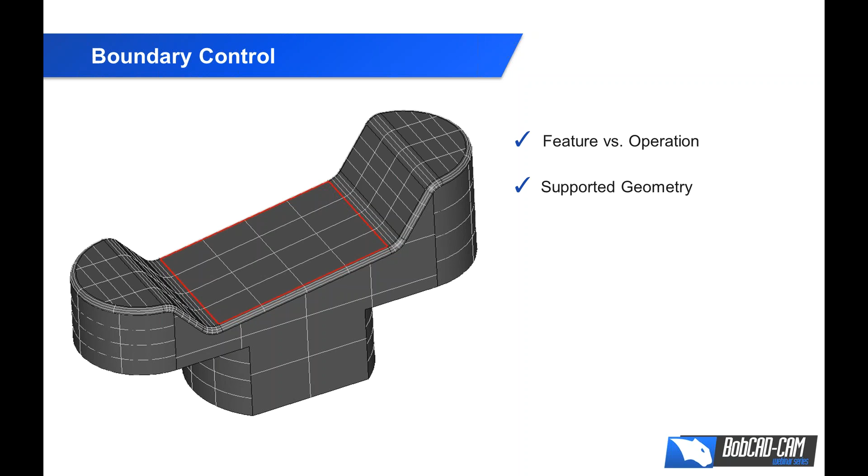We're going to talk about boundary control. When we're talking about boundary control, we're going to talk about feature versus operation boundaries. You have a feature boundary and an operation boundary. We're also going to talk about supported geometry, what you can use as a boundary, whether it's wireframe, surface edges, or loops. We're also going to talk about tool location, how the boundary affects where the tool is going to be.

Now, the big benefit of boundary control, or using a boundary for your 3D toolpath, is it limits where the toolpath is created by the selected boundary. So you select the geometry you want to work with, you select the boundary, and it gives you the ability to control where that toolpath is going to be generated.

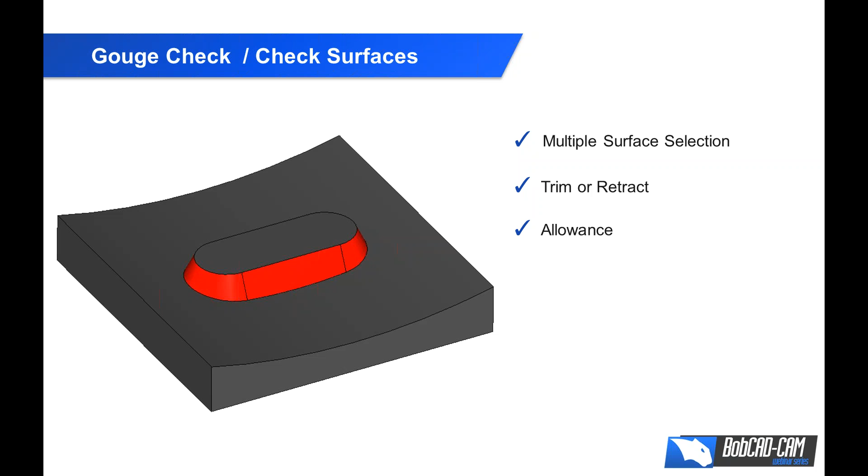All right, the other topic we're going to talk about today is gouge check with check surfaces. We're going to look at multiple surface selections, so you can select multiple surfaces to use in your gouge checking and check surfaces. We're also going to talk about trim and retract, the two different options that you have when you're using your check surfaces and different ways that you can use them. We're going to talk about allowance, how allowance plays a role in using check surfaces.

Now, the big benefit of gouge checking with check surfaces is it simplifies the user's control of where toolpath is created. And keep in mind, you can combine both boundaries and check surfaces for the ultimate control.

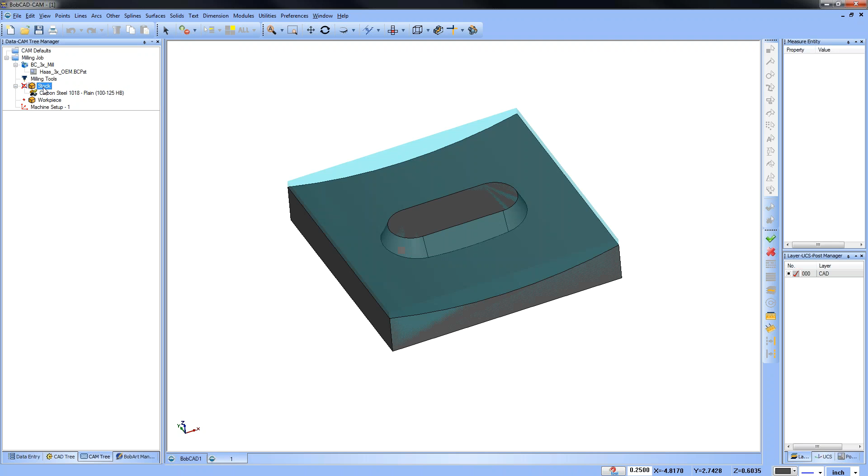So the first thing I want to address here is boundary control. I have my model, I have my job set up, I have my zero set up, okay? Everything's ready to go here. I'm going to load in my toolpath. So we're going to do a 3-axis. We're going to select our model here. Okay, we're going to go to our machining strategy, and I'm just going to use the advanced planar.

Okay, I'll set up a ball mill. The default is fine. The lace angle we're going to set to 0. Step over is fine. I'm just going to drop down the machining tolerance, and I'm just going to compute some toolpath. Now, if you haven't watched the 3D Bootcamp, I do recommend you watch that webinar.

It does cover a lot of topics about controlling your toolpath. But again, in today's webinar, we're talking about boundary control and check surfaces and the difference here. So we have our toolpath driving along this model. We can backplot this. You can see it moves back and forth over all the geometry that we've selected.

So the first thing that we want to talk about is the boundary control. Okay, so where do you select the boundary? If we wanted to limit where the toolpath was cutting on our model, one of the things that we would do is we would use a boundary. So when you look at the feature in the tree, you'll notice there's a feature boundary, and then we have an operation. You'll also notice that there's an operation boundary.

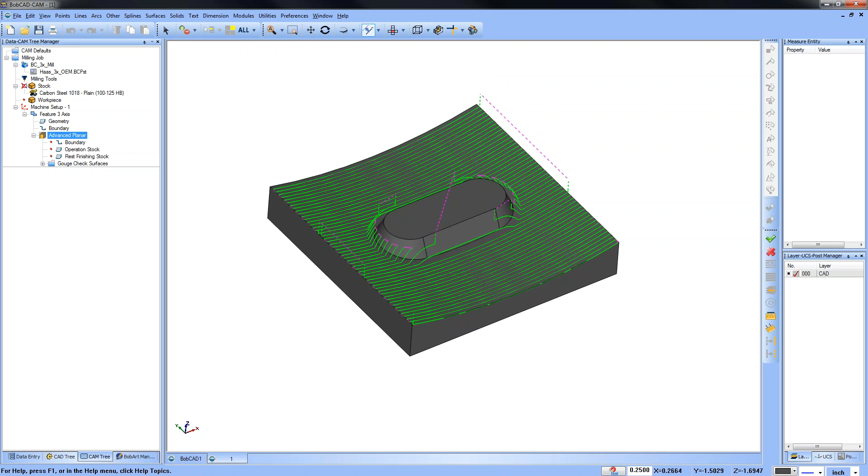Now, let's look at some of the geometry types that you can work with for a boundary. So if we come in here and we go to our boundary and we right-click and choose Reselect, right now the only thing that we have here is the solid model. So let's go ahead and just select this surface, hit our space bar, and recompute our toolpath. Now you will notice that it did trim the toolpath away from this model here, but that's typically not the methodology that I would use. I would generally not pick a surface to create a boundary, but you will find in some cases that you can get away with that.

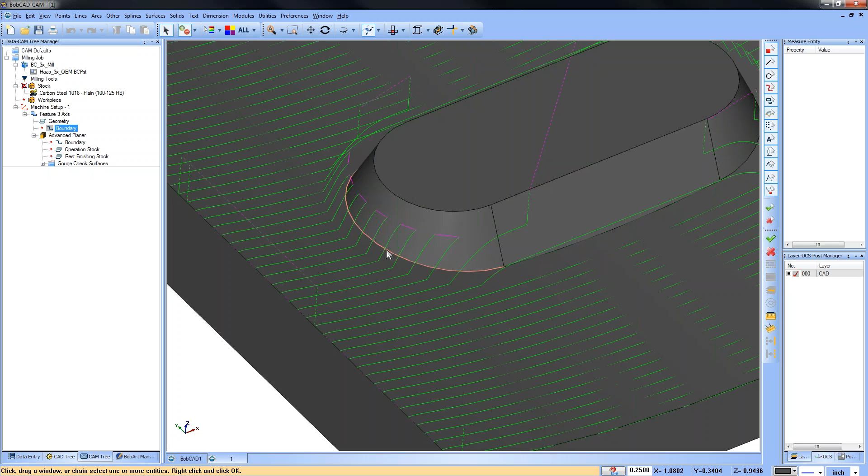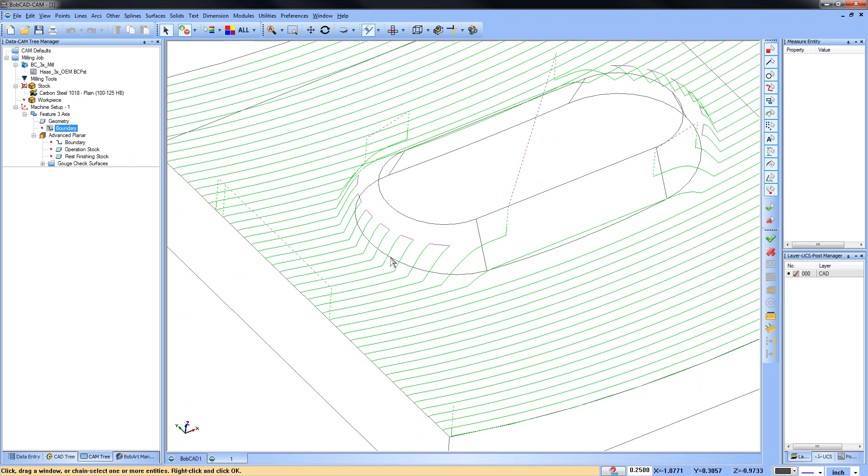More often, let's say I wanted to isolate this tapered boss here, I might come to the edge of that model. I'm going to turn my shading off by hitting S on my keyboard. I'm going to come over that edge and right click on it, and I'm going to get two different options: constant Z, or a loop selection. Now if I go to constant Z, what that's looking for is all the geometry that's at the same Z level. And as you can see in this example, it doesn't select all the way through because we're on a curved surface here.

The other option that we would have would be a loop selection. So if we right click on this edge and we go to loop, you're going to see there's two different options that are highlighted. There's this section in here, where it goes up and over this edge, and then there's also this outside selection here. Now the trick with the loops is not to pick the same edge that you started. You need to pick a different edge than you first started, either this edge to get this containment here, or this edge to get this containment here. So in this case I'm going to click on this edge and you'll see that it went all the way around, so it selected that loop there.

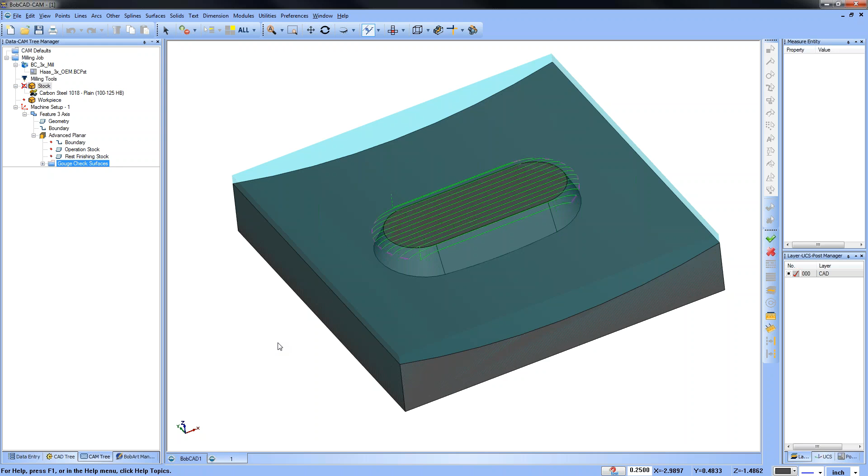So let's go ahead and hit our space bar to lock in our selection. We'll turn our shading back on. We'll recompute our toolpath. And what you're going to see is this toolpath is now limited to the boundary that we selected, which is right here. So instead of it cutting across the entire model, you can see that it's only cutting inside of that boundary. So where is your boundary located? It's either located at the feature level below geometry, or it's located below your operation. Hopefully that makes sense.

Now, when we're talking about supported geometry, we're talking about using surface edges. So I showed how to use a loop there. If we remove this, I picked the surface. That was one way that we did it. You could pick the surface, but generally that doesn't give you the control that you're really looking for. We're going to remove that. The next option you can do is to pick around the surface edges that you want to work with.

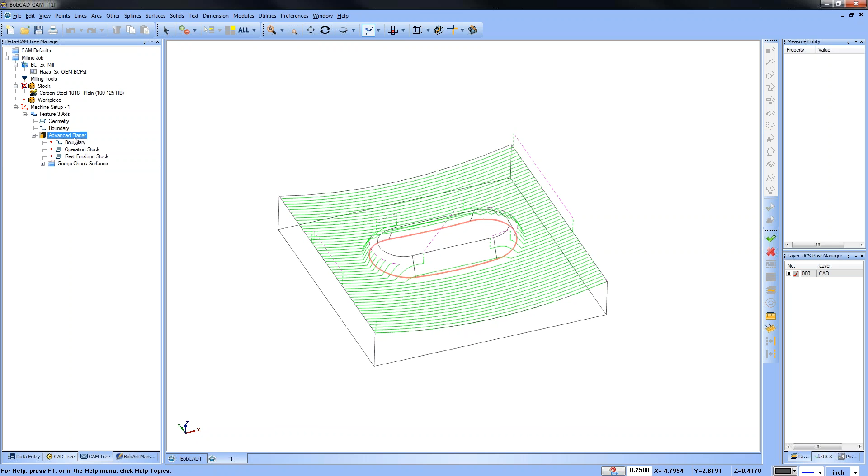So you can pick multiple surface edges, and you can recompute, and you can see that limits the toolpath then. Another option you can use when you reselect, you can right click on this edge and choose constant Z or a loop.

If you choose a loop selection, you just don't want to choose the same edge that you picked initially. You want to pick another edge that would represent the loop that you want to work with, okay? So all of those methods will work for boundary selection.

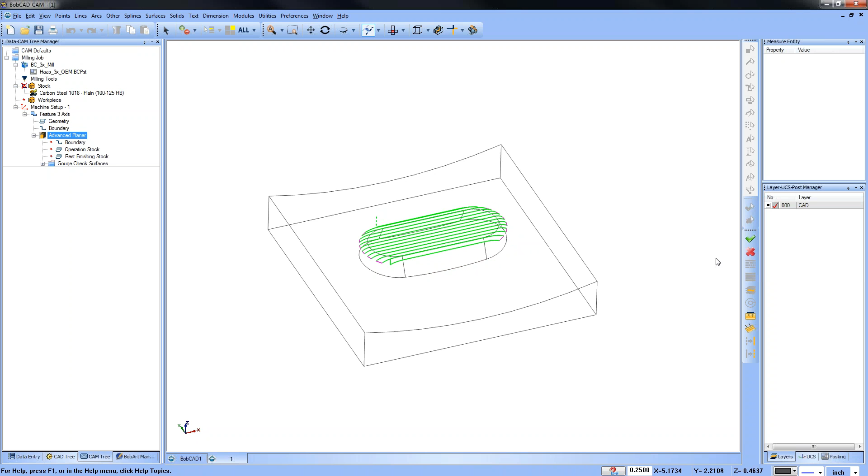Another option you could use as well if you want to go to wireframe is I would create a new layer. We could do extract edges, single, project to Z0. We can come in here and project a plane down, and then now we can use that wireframe as a boundary. Okay, so you can work with wireframe, you can work with surfaces, you can work with surface edges, you can work with constant Z, you can work with loops. So these are all the geometry inputs that you can use.

Now, it's also important to understand that even if the geometry isn't flat, so if I come in here, let me remove this boundary and reselect. If I pick some of these edges here, even though it's like a 3-axis curve, we can use those boundaries as well. Okay, so whether you're using the surface edge or the wireframe, it could be flat, it could be curved, it could be up and down in Z. So hopefully that makes sense for everybody. So that covers our supported geometry.

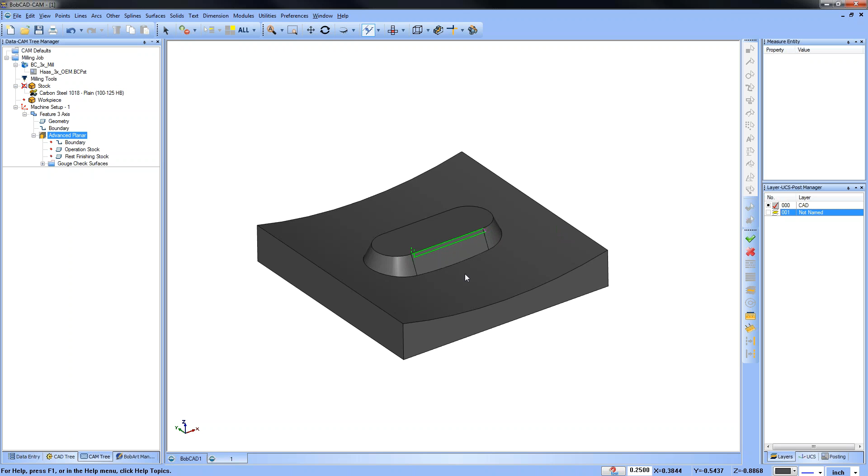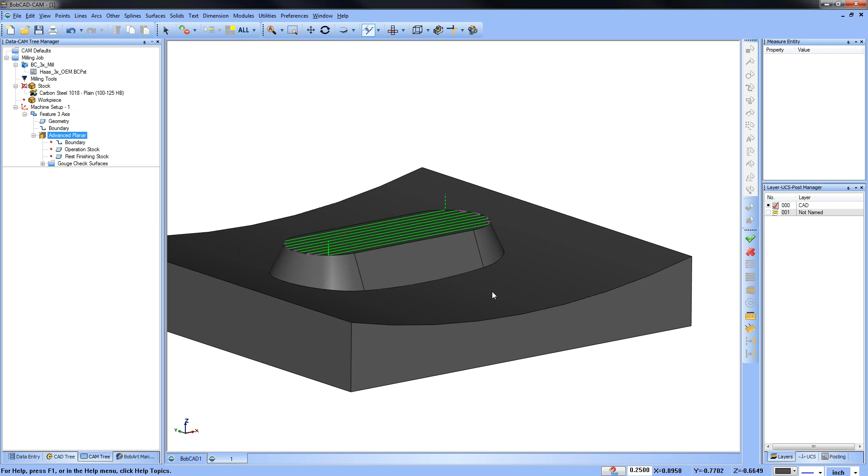Now the next thing that I want to talk about is the control of your boundary. So we selected a boundary, and as most of you know, the center of our tool is being driven to our boundary. Let's remove this. Let's come to this top edge here. We'll do constant Z, spacebar to lock it in, recompute. So we have this toolpath, and as you can see, the center of the tool is going to that boundary. So in some cases, that's going to work just fine.

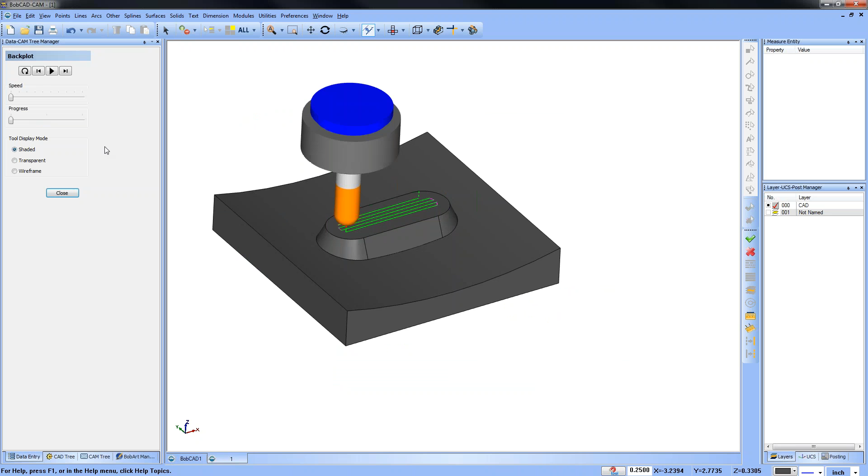In other cases, you may want it to extend outside of that boundary, or you may want it to come inside of that boundary. So if we edit our feature and we go to options, this is where you're going to see the limit control on the boundary. We can go to the center of the tool, which is the default. We can say tool inside with an offset. We can say tool outside with an offset. So if we say tool inside, it's going to adjust that boundary basically half the cutter, so the tool is staying inside of that boundary. So you have tool inside control.

If we come in here and we edit this, we go to options, we can say tool outside, we can recompute that, and then you can see there's tool outside control. So now we have the tool going outside of the boundary. So when you're using these boundaries, you have tool center by default, you have tool inside where it stays inside the boundary, and then you also have tool outside where the tool goes outside of the boundary.

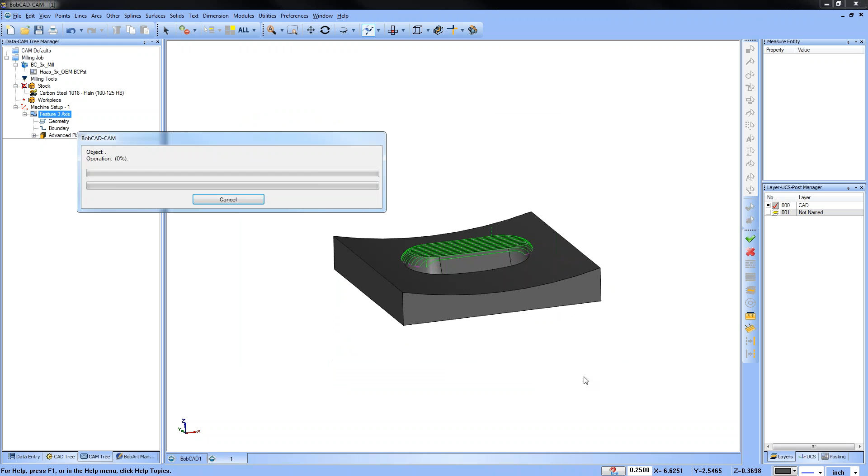Now you'll also notice that there was an offset option in there. So if we go to our options and we have an offset amount, we can tell it how much further we may want it to extend outside of that boundary. So here we selected the top edge. This is the boundary that we're working with. We said go outside, and then we gave it an additional offset amount to go even further outside of that boundary. All right, so hopefully that's clear.

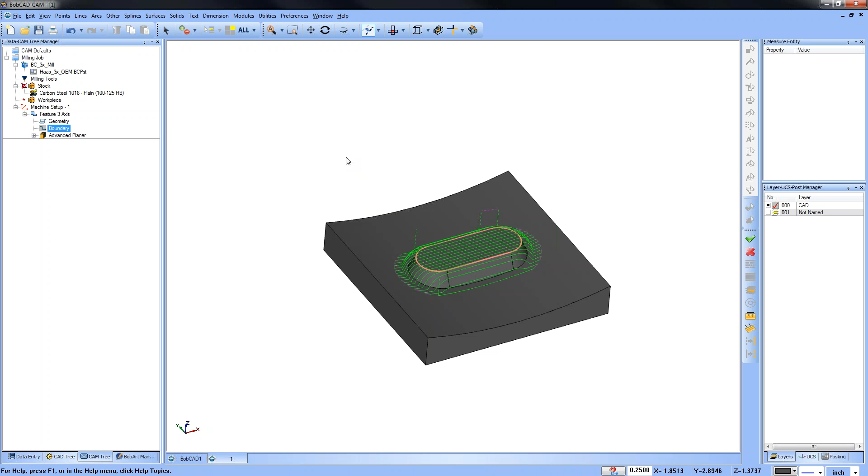You have your boundary control under the feature and under the operation. This allows you to use a different boundary for your feature or a different boundary for your operations. If you're using the same boundary for everything, you can select it once and then move forward.

Okay, we talked about the supported geometry. You can work with wireframe, you can work with surface edges, you can work with loops, you can even work with surfaces. All of those are available inputs for your boundary. The other thing we talked about is the control for center, inside, and outside. You can have the tool go to the inside of the boundary or the outside of the boundary, and you can offset.

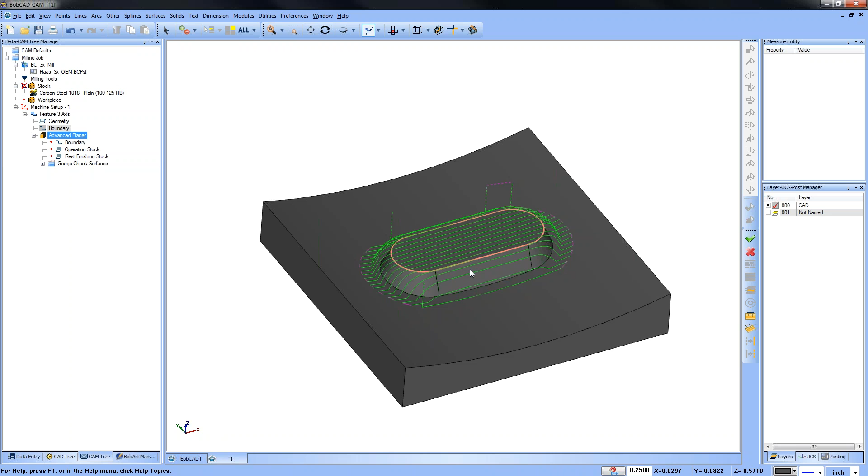Now, we did get a question that came in here. What if you want to cut the curved surface? So let's go ahead and take a look at that. Let's remove our boundary here and recompute our toolpath, and you can see the toolpath is cutting across the model. Now, if we want to limit the toolpath so that it doesn't cut this area here, we come in and select our boundary, let's go to our wireframe, for instance. We can select this shape and this shape, and we can compute that toolpath.

Let me turn my options off. Let's go back to Tool Center and recompute. What you're going to see now is the tool is going to the center of the boundary. So it's cutting the curved surface, and then it's cutting to the center of the boundary. So it's going from the outside to the inside of the boundary.

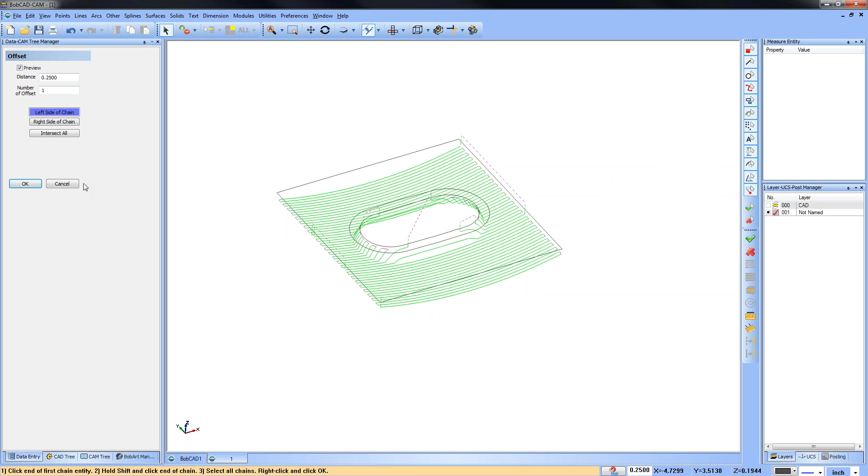Now the thing is, we may want it to stay further away from this wall and not right up this surface here, okay? So what you might do is offset some of this information. You might offset that boundary a little bit further. You might offset this boundary a little bit further. So that gives you a little more reach as far as what the containment is. You can change it by using the wireframe boundary. So now I can keep it away from that wall, and I can have it drive up to the edge of the surface. So hopefully that makes sense.

Now, keep in mind, today's webinar is about boundaries versus check surfaces, okay? So I want to cover some of the basics of the boundary control and how that works. So we talked about where it's located, feature boundaries versus operation boundaries, the supported geometry, and then controlling center, inside, and outside.

So does anybody have a question about that? If that's not clear to you at this point, go ahead and raise your hand. Ron says it's not clear. Terry says it's not clear. Terry Rinker says it's not clear. Okay, what if there is something that is unclear about using boundaries to limit your toolpath? Go ahead and type that question into the question box right now.

Okay. Let me see here. Let's see if Terry Brooks has a microphone. Terry, can you hear me? Do you have a speaker or a microphone over there? No? Okay. Thomas, do you have a microphone over there? Nope. All right, no mics. Let me clear everybody's hand. If you still have a question about this and you have a microphone, go ahead and raise your hand. Oh, let's see. Somebody here. Hold on. Who do we have?

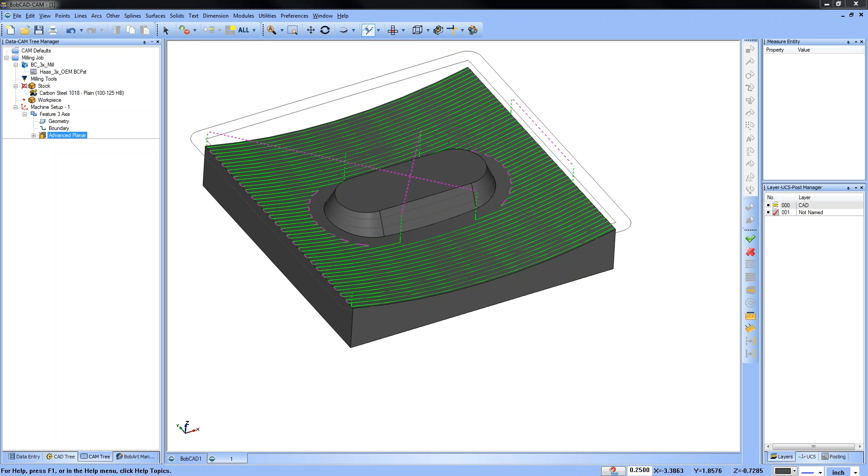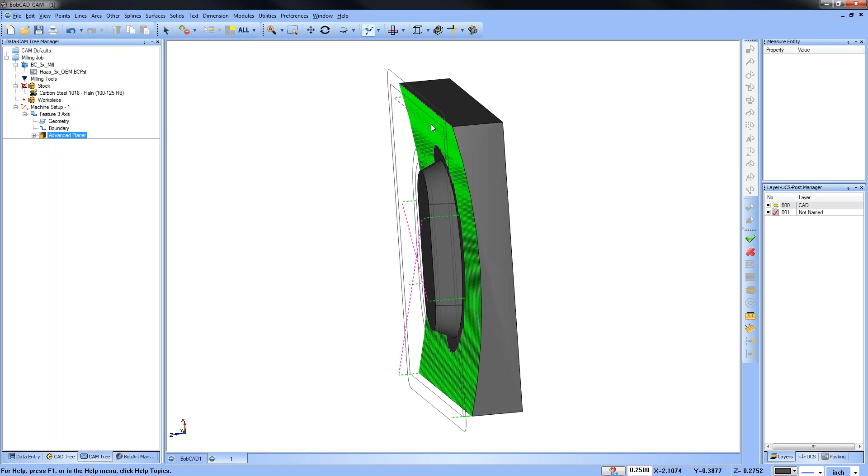And a question that I mentioned to you probably a couple of weeks ago during one of the seminars is when there's a 90-degree angle, for an example, what you have up here on the screen, if we were to turn this on its side and you were coming down, in fact, go to your X, make your X to where it's upright, because what I'm getting at is if you're cutting straight down on this, you know, even though this has a curve, and I was coming straight down on that, like right now, say we're looking at it from a Z perspective,

coming down on that to cut this right where the tangent curve is on your center portion, that example I gave you of that elephant seal, I was struggling to find the trade-off between not touching that edge that your cursor is on currently and that inner edge using, say, I was attempting to use a 1/8 inch end mill. Right. Okay. Now, does that make sense?

I believe we're cutting along this surface here. Is that correct? And yes. You want to stay away from this edge? Yes. And you want to stay away from this edge here, or no? No. Okay. Actually, I want to. Is this a tapered or a straight walled? So you're doing like a Z-level finish?

Did I lose you? No, I'm still here. This damn mic cuts in and out, and that's why I don't use it that often.

Okay. So you're doing like a Z-level finish on this? Actually, that wasn't the part I was trying to cut. The center part is actually what I was trying to cut. That was kind of representing, say, that elephant seal that I was doing. Right. So I would be coming down, and the part that you have the boundary on would be like the base that I don't want to cut.

But I want to be able to define like a front flipper or just some detail on this object. But trying to find that balance and that trade-off between touching the part and not touching what I would say is the foundation, so to speak. Man, I struggled with that for hours. Well, and did you utilize the check surfaces?

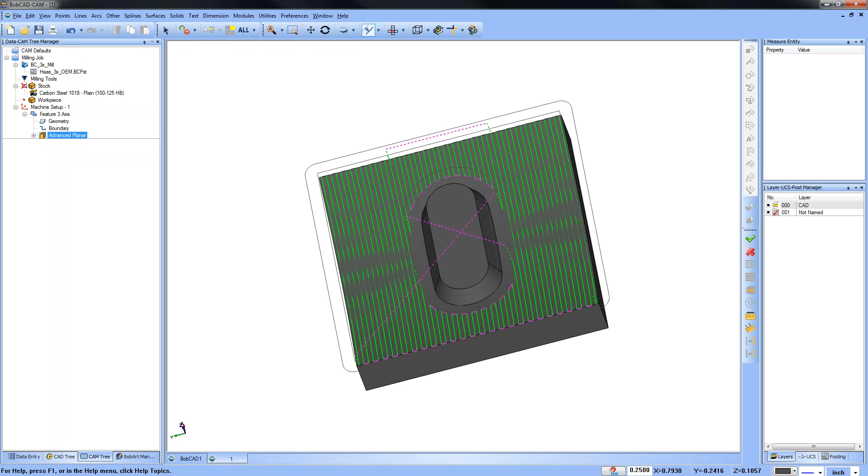It was just challenging, to say the least, because trying to find that trade-off between, and you've mentioned this before, Al, is, you have to do one thing, compute it, see how it reacts, do one thing. Again, I spent hours trying to find the balance between not touching the base of the part and still getting the detail I wanted on the 3D object I was trying to cut.

Yeah, no, there definitely is a balance, and that's really the main point of today's webinar, is really showing you how the boundaries work so you understand those, but then also how the check surfaces work as well. And sometimes it's a combination of both, but it does take a good understanding of the check surfaces and the way that they work. So hopefully as we continue on here, it will bring some insight to that. And again, we can always work together after the webinar to go into more detail.

Okay, Brian? Yeah, I appreciate it, Al. Thank you much. Thank you, bud.

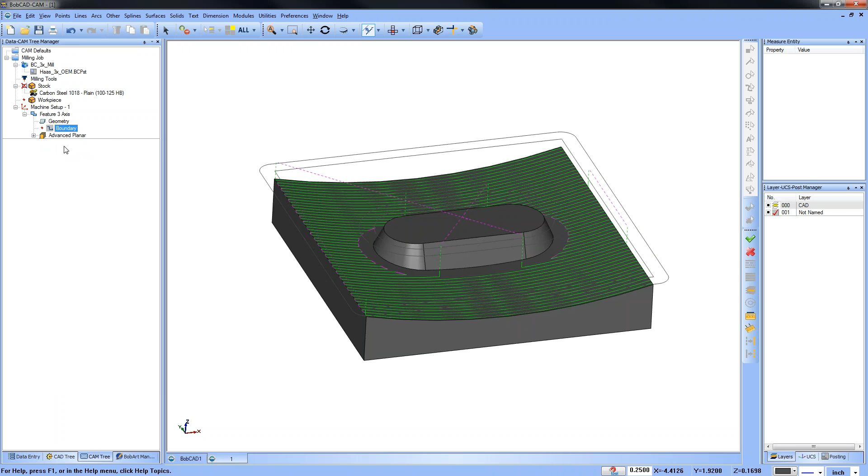Thank you. Okay, so it looks like we're pretty clear with our boundary control at this time, and let's move forward to the next topic. Okay, so the next thing we're talking about here are the check surfaces. So what I'm going to do is I'm going to remove this boundary control here, and I'm going to recompute my toolpath.

Okay, so the difference really between the boundary control and the check surfaces has to do with what your input geometry is. So again, instead of limiting where the toolpath is being generated, we're going to use our check surfaces to say we're making contact or we're getting close to this surface, and then what do we want to have happen. So the first thing we want to talk about is where are the check surfaces located.

So if we edit our feature and we go to where it says gouge check, this is where you're going to find the check surfaces. Now, in order to turn it on, you go to where it says check one and you turn it on. From here, you can select the surfaces that you want to check against. You have your allowance value.

You have whether you're checking against the tool or the tool and the holder, and then you have the strategy that you're going to use, whether you're going to do a retract or bump the tool up, or whether you're going to do a trim and a relink, okay? So this is where your check surfaces are located.

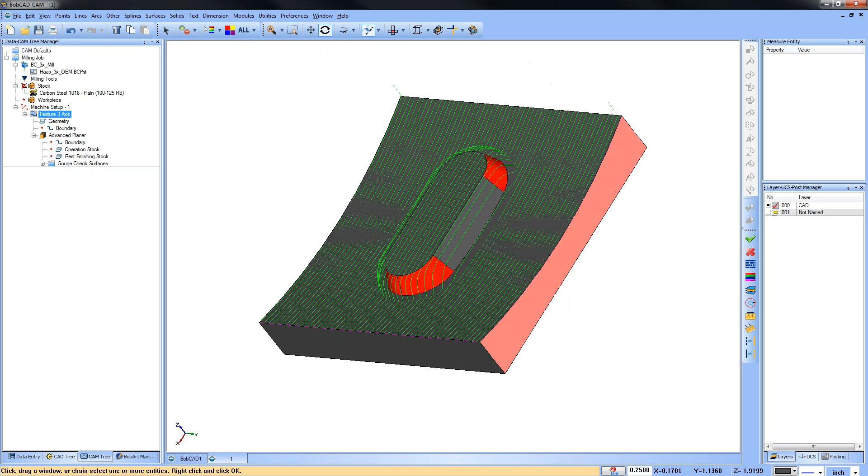The type of geometry you can work with check surfaces are, you guessed it, surfaces. Okay, so we're going to want to go ahead and click check surface, and then we're going to select the surfaces that we want to pay attention to. So in this case, I'm going to select just the walls of this tapered boss here. We'll hit our space bar.

What we want to do is trim and relink our tool path, and I'm going to leave my allowance at 0 to begin with, and then I'm going to compute. And what you're going to see is really nothing changed, right? Hopefully that's not surprising to you. The allowance is saying how close the tool can get to that surface, and if I didn't leave an allowance, then the tool is going to drive right to that surface.

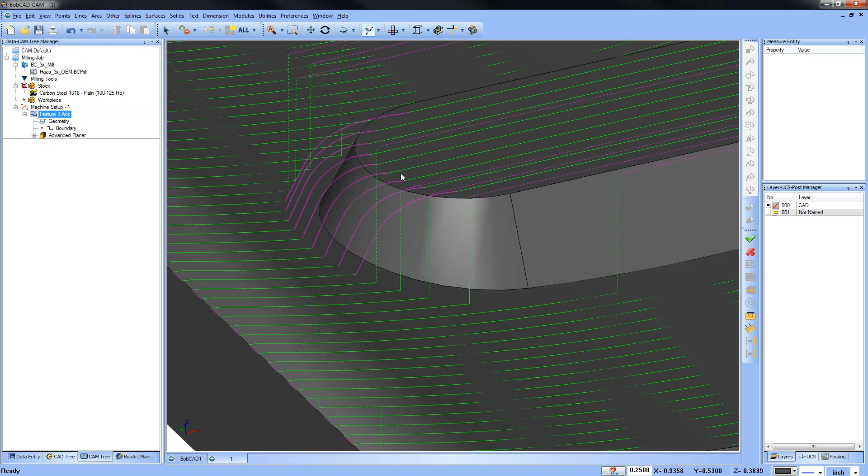If we come in here and we edit this again, and now we add an allowance amount and we recompute that tool path, now you're going to see areas where it's starting to push back or trim away the tool path. These are linking moves you're seeing here. These moves here are rapiding and then moving over, okay?

So as we increase our allowance, bump this number up further and further, the tool's going to stay further and further away from these walls here, and these are the walls that we had selected. So we're having them go up, go over, and it's also staying away from this edge. Now if we add to our check surface this top one as well,

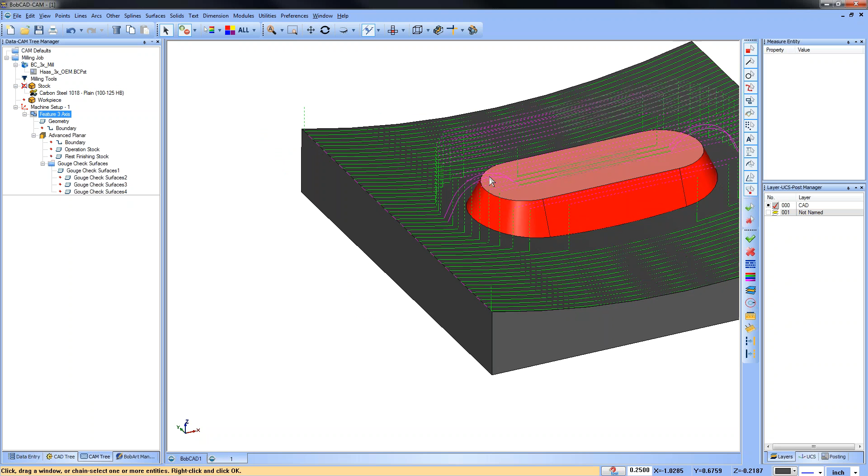okay, if we add that top one as well and then we recompute, you're going to see it's just going to check out that area altogether. And as we increase our allowance, it's going to move further and further away from that surface. So the check surfaces and gouge checking is located within the feature, down here where it says gouge check. The type of geometry that is supported is the surface geometry.

The control that you have is you can either trim and relink, or you can bump the tool up where it will get away from that area. And Brian, that may be the solution you were looking for: not trimming the tool path away, but instead using the retract method to bump it up so that you're getting as close to that surface as you possibly can.

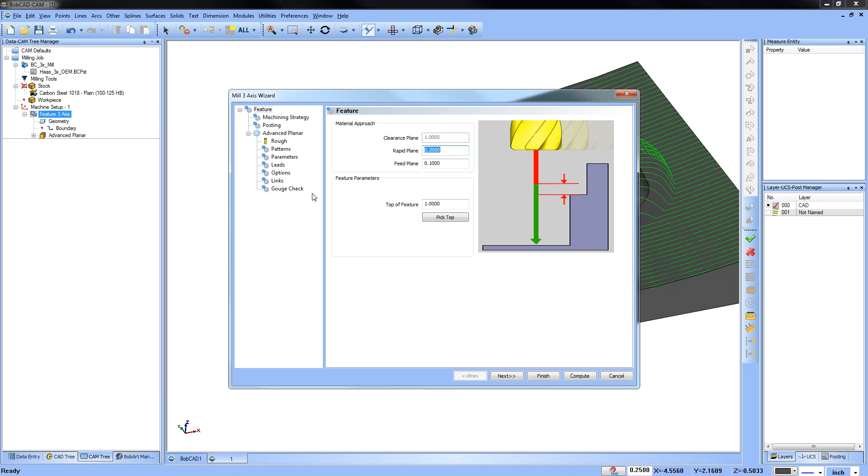So let's go ahead and edit this. We're going to make this number bigger just so we can exaggerate it. Using the retract, you can bump it up. This is saying the clearance plane is too low. If you make it too large and it runs into the clearance plane, then it will error out, and you'd need to change your clearance plane so that you have room for the tool path to be calculated. We'll drop it down again.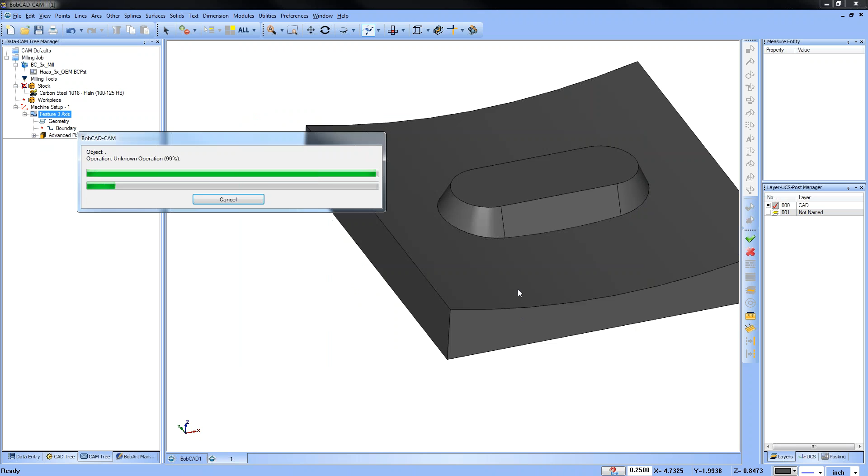The idea here is to show you that the tool path is being bumped up, staying away from that surface, or retracting away from that surface. These are great features to have, because unlike boundaries where you're limiting where the tool path is generated, you can select surfaces and say, trim away from there, or stay away from there. That's what I really like about the combination of boundaries and check surfaces.

The next thing we want to look at is what toolpaths offer these check surfaces. If we edit this feature, all of your Mill Professional toolpaths offer check surfaces: advanced rough, flatlands, equidistant, pencil, advanced planar, project curves, and advanced Z-level finish. All of these utilize the check surfaces to trim away or to bump up your toolpath.

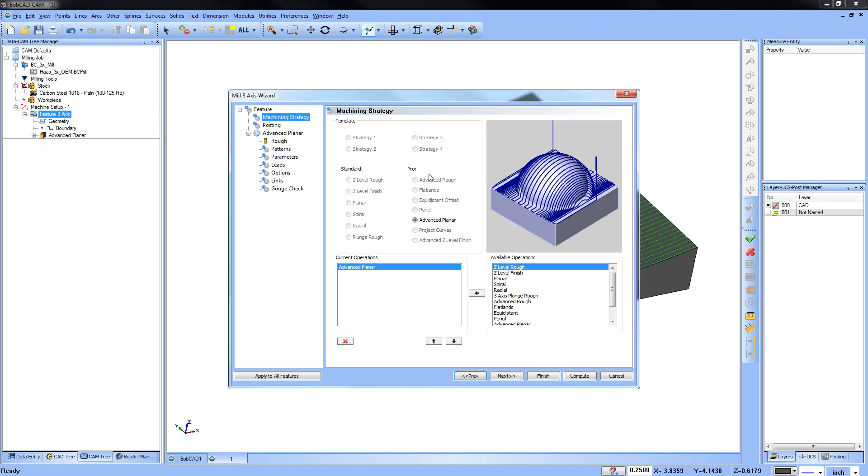So we talked about boundary control, what's supported, the way that it works, where it's located. We talked about our check surfaces, where it's located, what type of geometry is supported, and then the control that you have on it. And then we talked about which toolpath features have it available, and it's all of your mill professional toolpath features have those options for you.

All right, so if we're looking at this here, let's play around with this file for just a second. At one point we had selected these surfaces here. Let's go ahead and clear that selection. This time we're going to select this surface here, and we're going to recompute. And what you're going to see now, this is where we're bumping it up. So it's bumping up the toolpath away from this surface here and generating our same toolpath. So we're adding more stock to finish on the bottom there, okay?

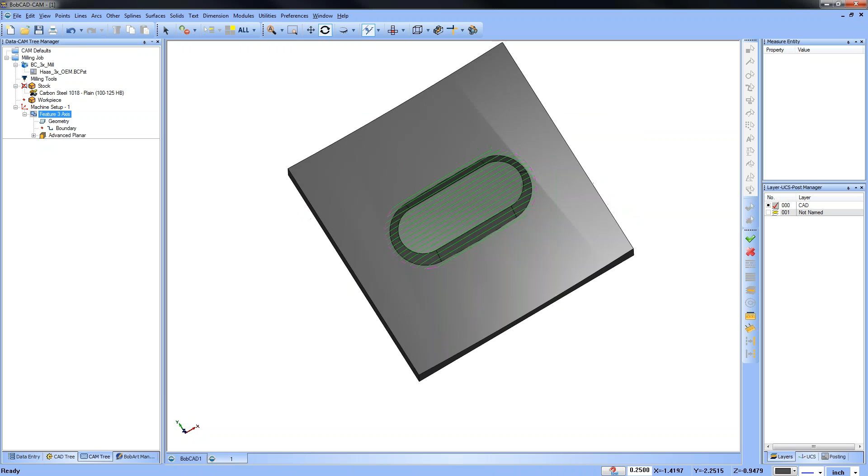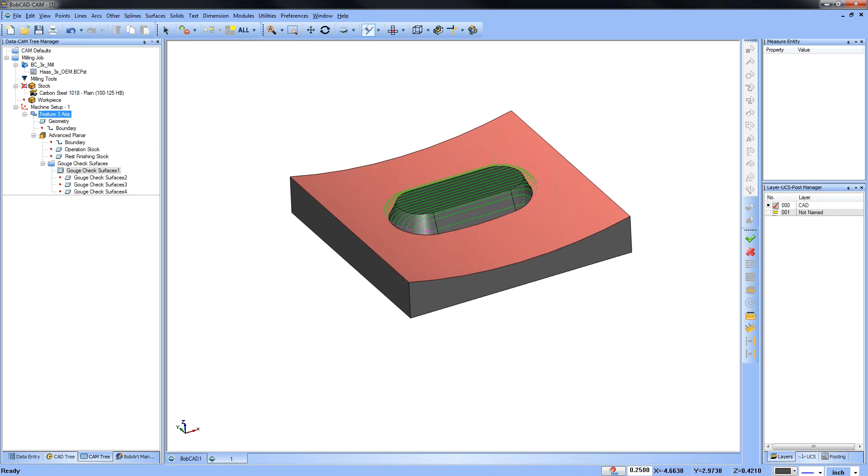If we come in here and, instead of doing a retract tool, we do a trim and relink and we recompute that, what you're going to see is it's going to trim away the toolpath that makes contact with the check surface that is selected. Okay, so hopefully that makes sense for everybody. All right, so now let's take a look at some more sample files, because I really want to make sure everybody has a good understanding of the way that these check surfaces work.

Okay, so here we have another file. We have our toolpath selected. Again, just a planar toolpath. The check surfaces that we've selected were these top surfaces here. We have it set to trim and relink, and what that's doing is we're saying, hey, we need to avoid toolpath making contact with these surfaces here, and you can see that it's trimming and relinking that toolpath.

All right, now another thing that I think is pretty important has to do with the fact that you can have multiple check surface groups. If we get into this feature and we look at our gouge check, you have check 1, 2, 3, 4. When you first start using gouge checking, I definitely recommend that you start with just one check surface at a time.

Now, Ernesto had a question about, are the rapid lines bumped up too? The rapid lines are going to follow your clearance settings that you have set in your feature. So if you go to the feature, clearance plane, rapid plane, feed plane, these are going to be the options as far as where the tool is driven to. Marja said, what about the options to trim and relink? Can you explain which ones to use? So we're going to look at that in this particular example here.

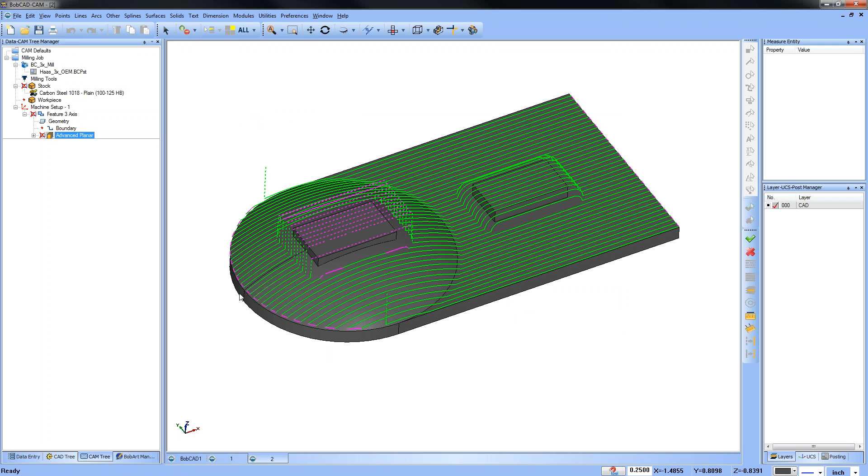Okay, so we have our check surfaces. What I'm talking about is you can use different check surfaces. So we're going to click check surface here, and we're going to remove this one, spacebar. We're going to recompute. And what we're going to see is the toolpath is now driving along the top of that surface here, with a certain clearance amount that we have set. Now we're going to use a second check surface. We're going to select this surface here. We'll use our trim and relink, and then we're going to add a different allowance here.

So this is one of the features of using check surfaces that you don't really have for the boundary control. With a boundary control, you can set an XY boundary. So we could go to wireframe and set an XY boundary, so you could have it closer to one boss than the other boss. But with the check surfaces, you can select different groups of surfaces and apply different allowances, which I think is a really great feature and gives you a lot of control and flexibility. So we can use different allowances for the different surfaces that we've selected.

Let's go ahead and turn that one off and recompute. All right, we're going to add this surface here. Okay, and recompute, and you can see that our toolpath is generated there. Now, when you start using the gouge checking and check surfaces, when you go to trim and relink, you do have a bunch of different options in here.

If we scroll down, you can see after first collision, before last collision, between first and last collision, trim before first collision, trim after last collision. And what this does, if you use trim collision only, a lot of times that's going to give you a result that is beneficial, but one of the things that you're going to notice here is that we have a lot of up and down tool motion. So we're making contact and we're going up and down, and that may not be the ideal scenario.

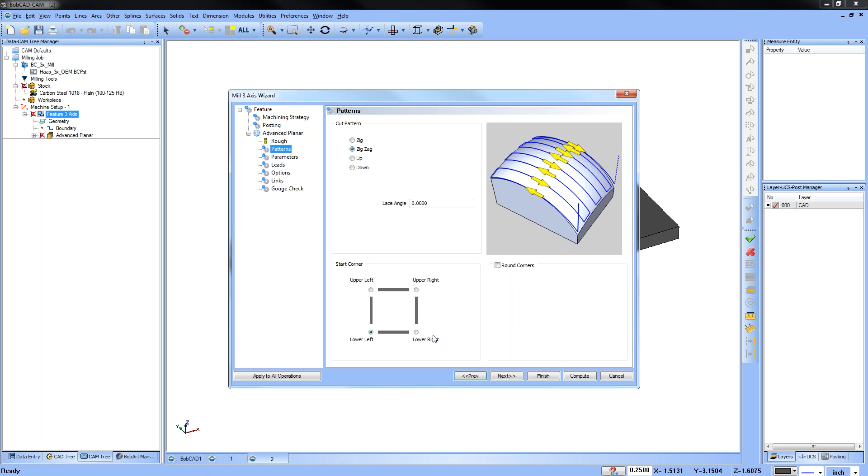Now, another question that came up that I didn't address here, someone asked earlier where the tool starts from. If we go in our pattern page, if you want to change which corner it starts in, you can just click on which corner it starts in, and that's the control that you're going to have for like planar, where the tool starts. In some of the other strategies, it's going to depend on what options are available in that strategy. But in this particular strategy, we can choose which side we want it to start on just by clicking our start corner, and that's the control that you have there.

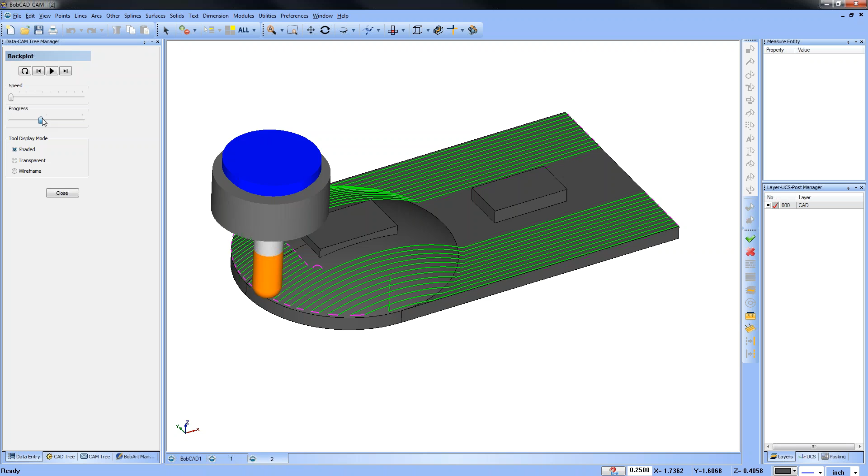Okay, so we have our tool path. It's moving back and forth. It's starting in this front corner here, and as soon as it makes a contact to trim out, it trims away all the tool path that's in that area.

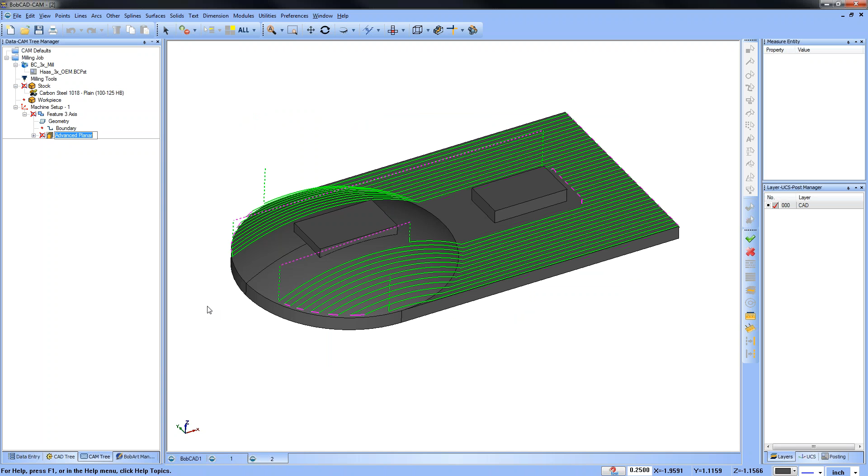Again, when we had that turned off, if we go to trim collision only, that just removes the tool path, and it generates tool path in between here, but we get a bunch of up and down motion, and the control that you have to lead the tool in, that is where it may be lacking some of the control that you want. So using some of these different trim options will allow you to address different areas. If we go trim after last and we recompute, we're going to see a different set. So now it's switched which side it was working on.

So my best recommendation for you is to go through these and get familiar with them, and the more you use it, you're going to find scenarios where you want to use one over the other. So when you first start, just trim at collision, and then from there you can work through some of the different options and see the effects that it's going to have on your tool path. Again, giving you the control to come in and work through some of this stuff here.

Let's see, there's another question. How can I let the tool travel outside the boundary if I need it to? Say I'm cutting a channel on a flat part and I selected my geometry. It won't let me escape that boundary. How do I change this so the tool will be able to go outside of that area? Thank you, Jeremy. That's a great question. I'm sure everybody has run into this. I know I've run into it myself quite a bit when trying to use a boundary.

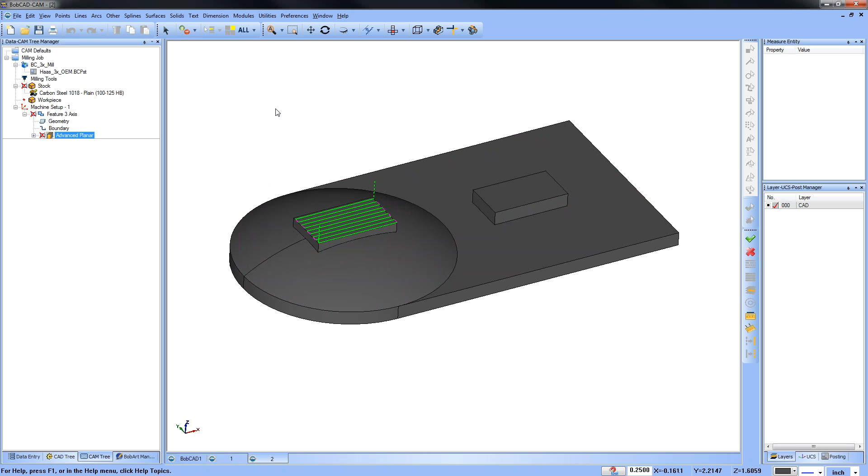So let's turn our gouge checking off, and we're going to recompute here, and you see that we have our tool path. Let me grab one of these loops, this constant Z here. The way this works, Jeremy, in short, is there has to be geometry there, like surfaces. 3D tool paths are based off of surfaces and solids, and if you want the tool to go outside of that boundary, go to options, set tool outside to 1 inch and recompute, and you're going to see that the tool path goes outside of that boundary. Here you can clearly see it's going outside of that boundary.

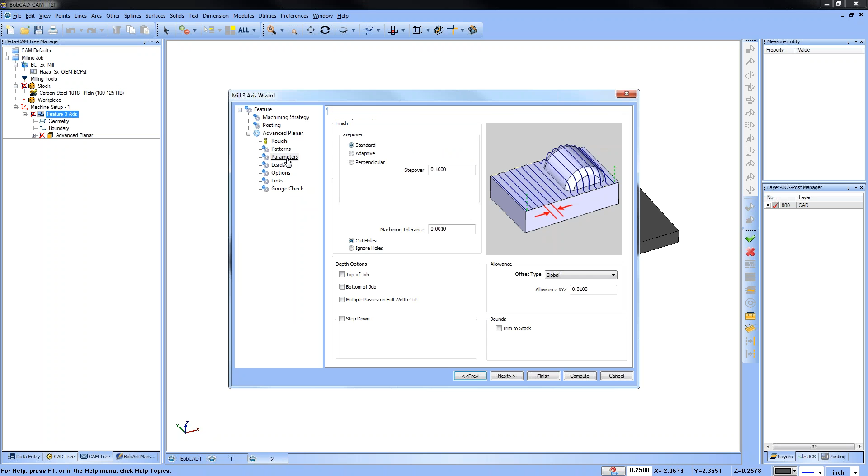Now, if we want it to go further outside of that boundary, let's make it 1.5 and recompute, and you're going to see that it's going further on this side, but it's not going further on the left side.

Okay, and that's because there's no surface. Well, there's a couple of reasons, but there's no surfaces to be driven along there. If you look under some of your other options, your cutting extents, we have set to extents. So that is another limit that's happening on the tool path.

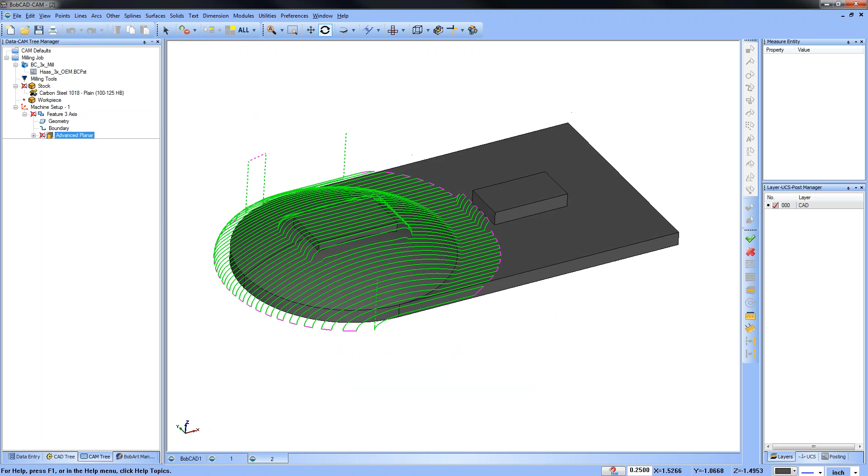If we go to part bottom and we recompute, what we're going to see now is that it extends past that edge, and then it's also going to start going down to the bottom of the part. Okay. The other thing that you would look at here is if you say 3D extents, that's kind of like a rollover amount, and that's going to roll over past the edge of the part as well.

Okay, so these are some of the options that you're looking for, but I think the scenario you're talking about is where you don't really have tool path to drive that tool along. And keep in mind, the boundary that we selected was this boundary here. So you can see that I was able to get it to go outside of that by using the tool outside, but in order to get it to trim past the edge of this surface, I had to adjust some of my other limits. So hopefully that makes sense for you there, Jeremy.

I think that is a great question. So thank you for sharing that.

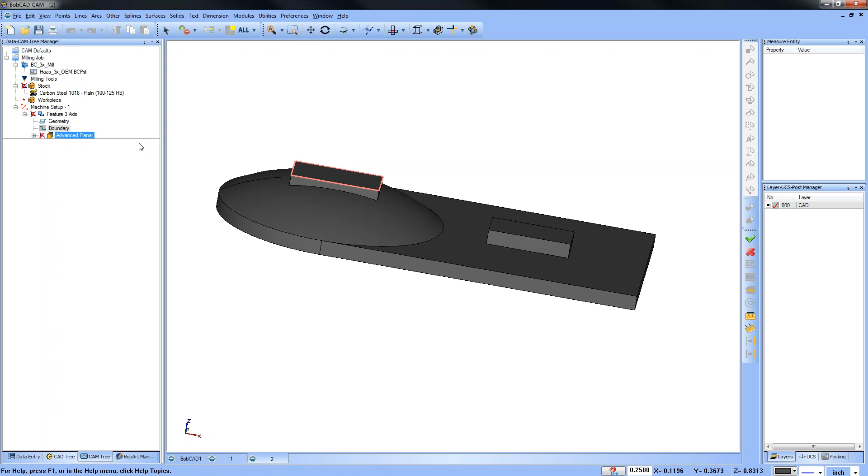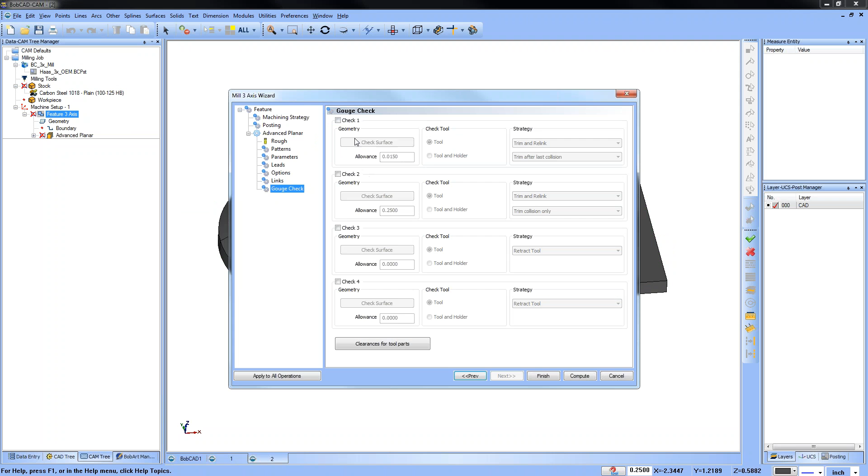Okay, so what do we got? So we got our surfaces. Let's look at some other ways that we can do this. Let's remove our boundary here, and we'll recompute our toolpath. So we have our toolpath going over the whole model. If we wanted to eliminate the toolpath from running along these surfaces, we can go to a gouge check, let's remove this one and this one, and we'll select this one here as well.

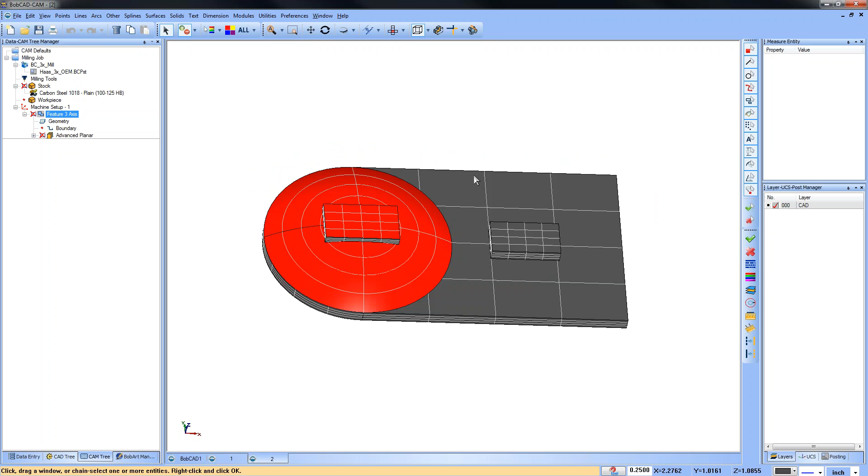If you guys ever are having problems selecting surfaces, kind of like what I was showing there, sometimes it makes sense just to go to a wireframe view. This is S and W on your keyboard. It will help so that you're seeing the same things that the software is seeing when we're doing a selection.

Okay, so we're going to hit our space bar. We're going to trim and relink. We'll go ahead and recompute. And you can see this is a way to limit the toolpath to run along these edges here and to stay away from this surface, okay?

So again, when we're looking at using boundaries versus using check surfaces, there's pros and cons to each. When it comes to check surfaces, I think you'll find it a lot easier to say, hey, if you make contact with the surface, bump up or trim away, okay? So I'm glad that helped you out there, Jeremy.

All right, let's look at another file here. Let me close this guy down, and I'm going to load up this file here. All right, so the other day I was working with a client, and he had this part he was trying to cut, and we were trying to use flatlands, and no matter what we did, it just would not let us use flatlands, okay? And I was stumped, and I didn't know what it was.

And actually what had happened is the surface had a slight taper to it, but it was very difficult to see it. And that was kind of the mindset that I had when creating this sample file here, showing how you can drive toolpath along surfaces that are in a little different areas that could be a little more difficult to create a boundary for, to keep the tool away from.

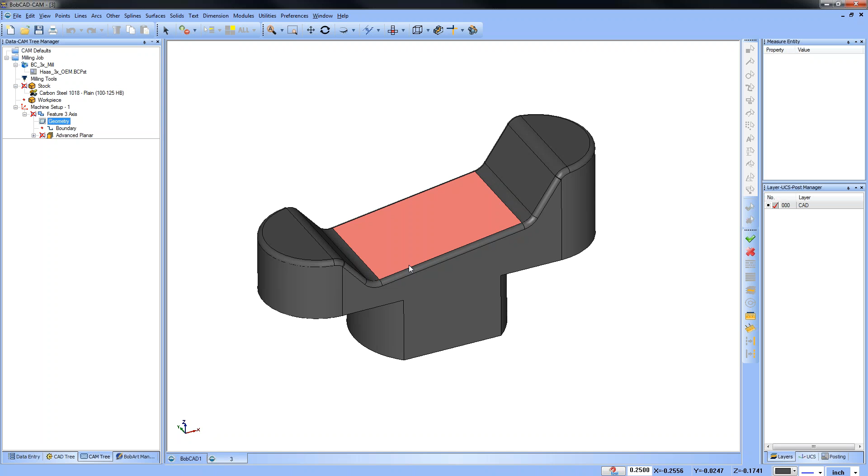Okay, so if we look at this model here, I do have this check surface set up. Let's go ahead and turn that off and recompute our toolpath. And you're going to see that this is the surface that I want to cut, and this is the toolpath that's being generated on that surface. Now, when you're doing 3D machining with BobCAD, the surface that you select determines where the toolpath is driven to.

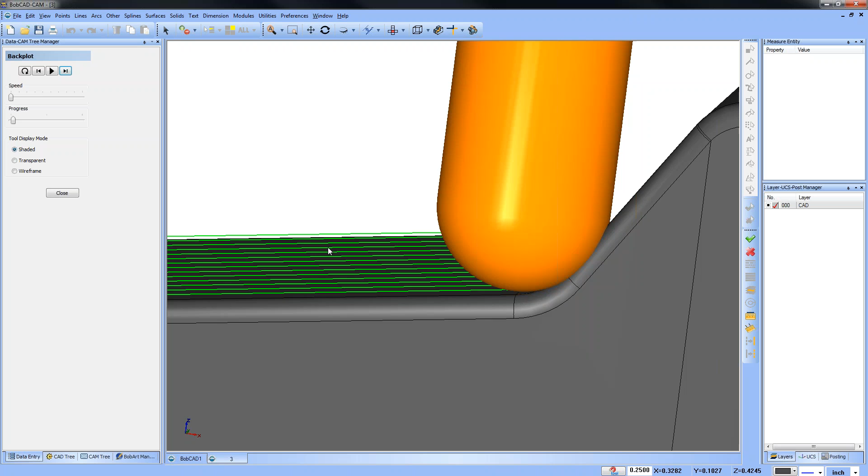So because we didn't select any of these neighboring surfaces, you can see how the tool is making contact with that surface there. You can see how they make contact, and let's go to a front view. So that would be a problem, and the reason why that happened is the surface that we were driving the tool along was just this bottom surface here.

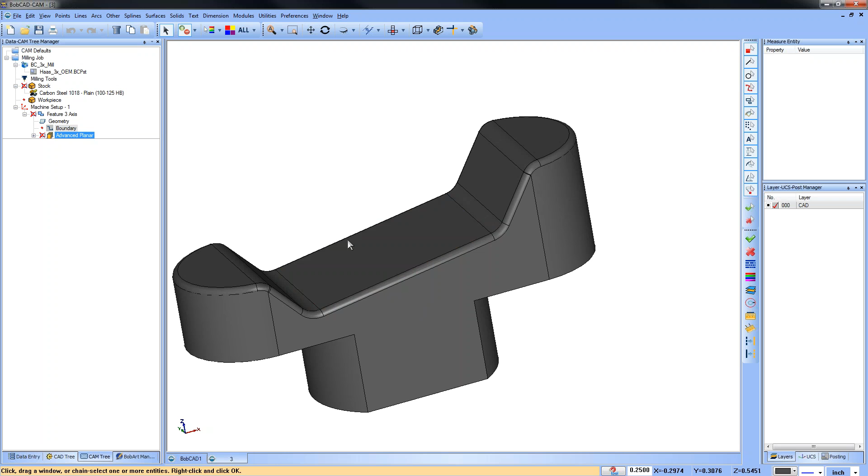So we selected just this bottom surface, and then we generate our toolpath, and it's colliding in these other surfaces because they weren't part of the selection, okay? So if we go to a boundary selection on this, we select this surface, let me clear this. We select this surface as our boundary, we hit our space bar, and we recompute.

What happens now is the center of the tool is driven to the boundary, because that's the default. Now that definitely didn't help us in this scenario. We're still running into an error, okay, where we're colliding with this other surface. Well, then the next thing you're like is, okay, let me come in here and let's go to some of my options and say tool inside, okay, and we recompute.

So now we're driving the toolpath inside of this boundary, and then it's staying inside. But what you'll notice is when you use tool inside on a boundary, it's offsetting inside on all four sides. So now we're missing material over here, and we're really staying quite a ways further from that wall, so we may not actually even be cleaning that up the way that we want it to.

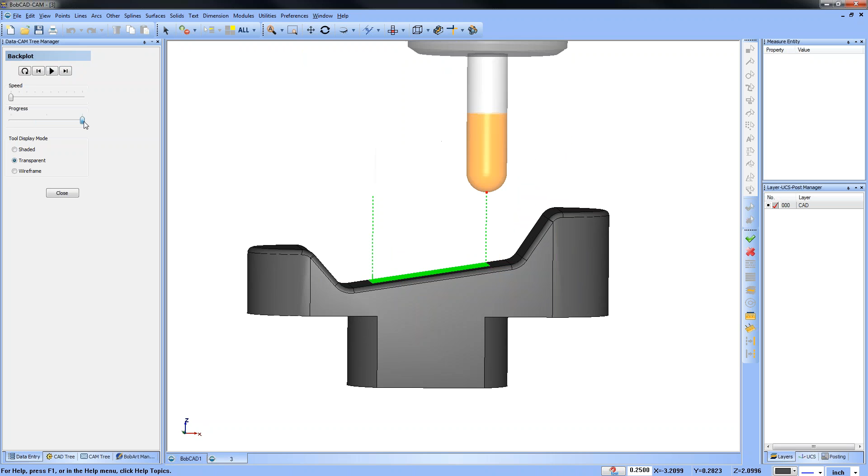Okay, so this is another example of where check surfaces make it a little bit easier to attack scenarios where you have walls that you need to machine up to, but you don't want to make contact with. Okay, so let's remove our boundary, recompute our toolpath, and from here we're going to come in and we're going to add some check surfaces.

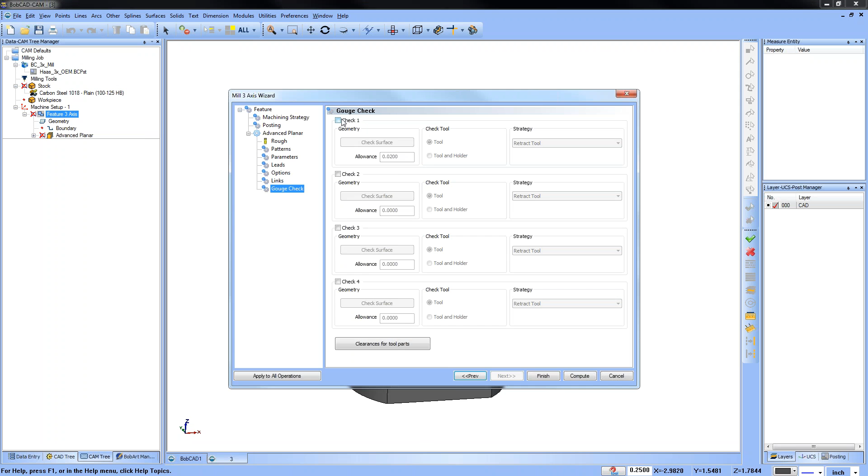So we're going to go gouge check, check surface, and we're going to come in and select the surfaces that we want to keep the tool away from, or if the tool makes contact with these, we want to keep the tools away from that area. Okay, so we're going to hit our space bar. We have our allowance. We're going to trim and relink and recompute.

And what you're going to see is the toolpath now is driven along these surfaces here, and they're going to come up right up next to that wall, but they're actually not going to make contact with that wall. And then if we want to make that gap smaller or bring it in closer, we just come in and we adjust what our allowance is. Maybe it's a smaller and smaller number so we can get closer and closer to that wall.

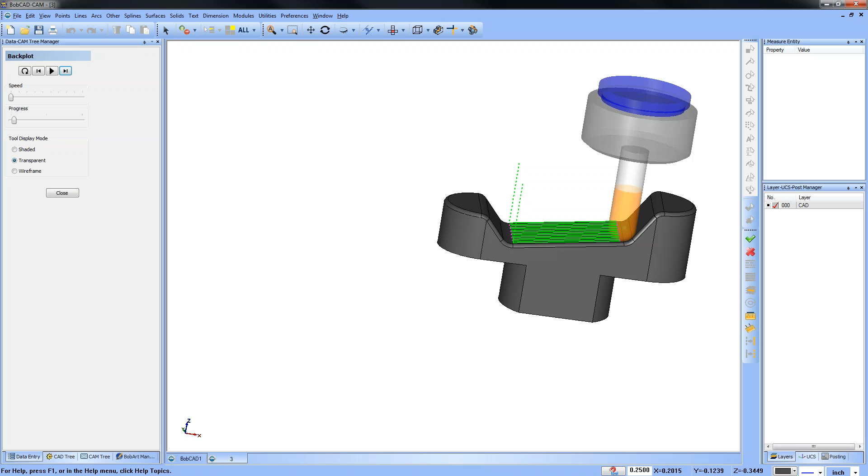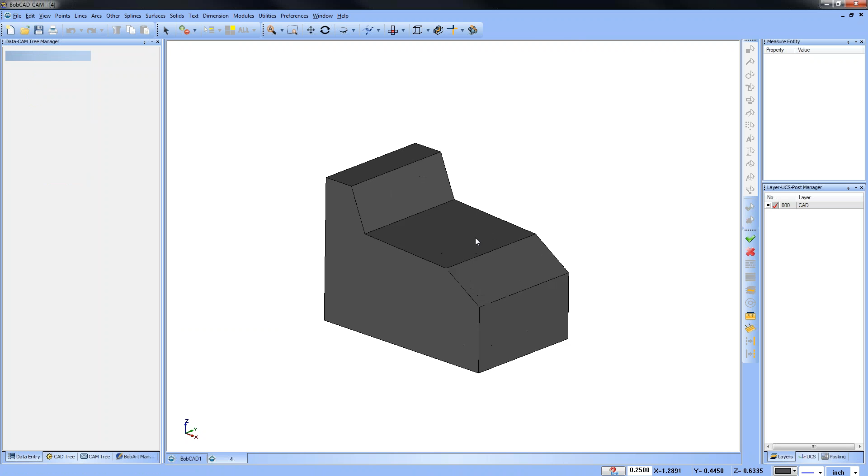Okay, so again, these are ways where we can machine difficult to boundary surfaces, or surfaces that would take a lot of wireframe to create boundaries for. Now you can attack them using check surfaces. Okay, so let's go ahead and close that guy down. Let's drop another one in here. All right, so here is another sample of a surface here. We have our toolpath being driven.

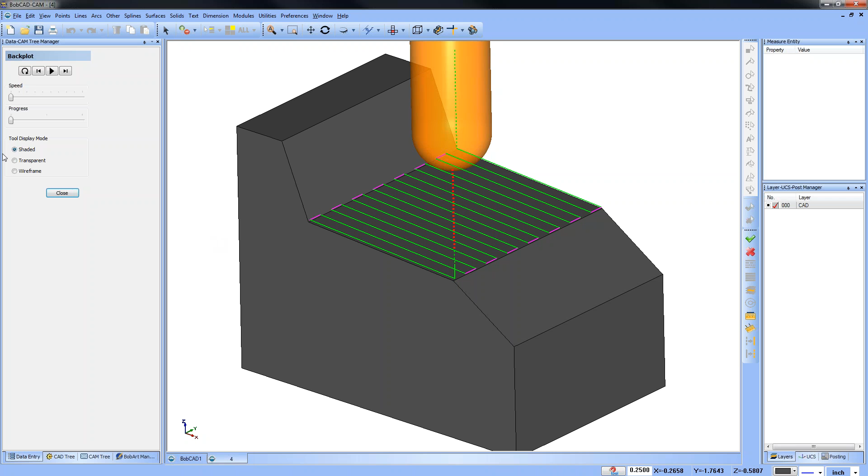Let's go ahead and turn off our gouge checking and recompute, and here you can see the toolpath is being driven right to the edge of the surface. So that's a good point to understand, is that when you're using boundaries, the default is the center of the tool goes to the boundaries. When you're machining surfaces, the center of the tool is going to go to the edge of the surface when you only select one surface at a time. And then here we can see clearly the tool is going to run right into that wall.

Okay, so what we can do is come in here, turn our gouge check on, use a check surface here, select the wall that we want the tool to avoid. Okay, trim and relink. We can hit compute, and then you're going to see now the tool is going to stay away from that wall. So this is again just another way in which you can machine an irregular surface. This one happens to be a slight taper, so you can't come in with like a flatlands or something like that to get it. So we're going to use our check surfaces to check that toolpath away.

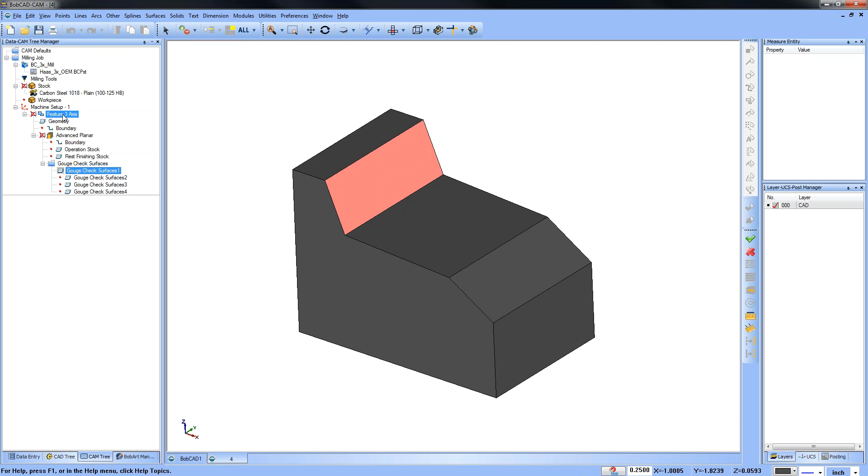So let's go to, all right, so we have this file here. The other thing that I wanted to talk about, so we did this, we used this surface here and we used an allowance. I think it's very important to understand that if I select another surface here, let me go ahead and select this surface here, the effect that selecting that surface will have on the toolpath, okay? So if you see the toolpath right now, you can see it's going right up to that edge. If we zoom in here, you can see the toolpath goes right up to that edge.

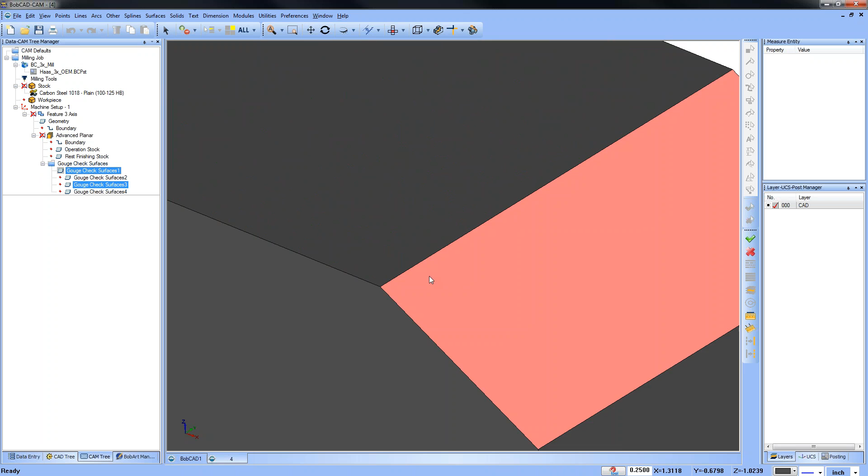By adding this other surface here, this angled surface, as part of our check surface, right? What's going to happen? Well, what do you think is going to happen? Raise your hand if you think it's going to do nothing. Okay, nobody thinks it's going to do nothing, and I would agree. Or well, maybe Walter thinks it's going to do nothing. I don't know, Walter. I think something's going to change.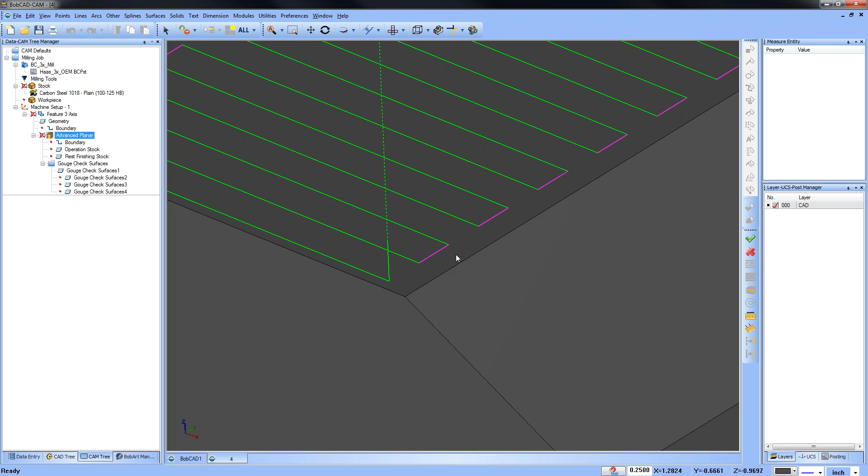So let's go ahead and recompute here, and something did change. You can see that it bumped away from the edge of that surface as well. So this is the surface that we selected. We had an allowance, and it will affect the edge of surfaces as well. So you keep things away, all right? Really important to understand, and that's really what this particular sample was about, keeping the tool away. Steve has a question.

If you use a ball nose bit, why would it change? It wouldn't touch that surface, would it? You know, I don't think it actually does touch that surface, Steve. It's not that it touches that surface, it's that it's within proximity of that surface. It's within the allowance amount of that surface, and that's what you have to pay attention to.

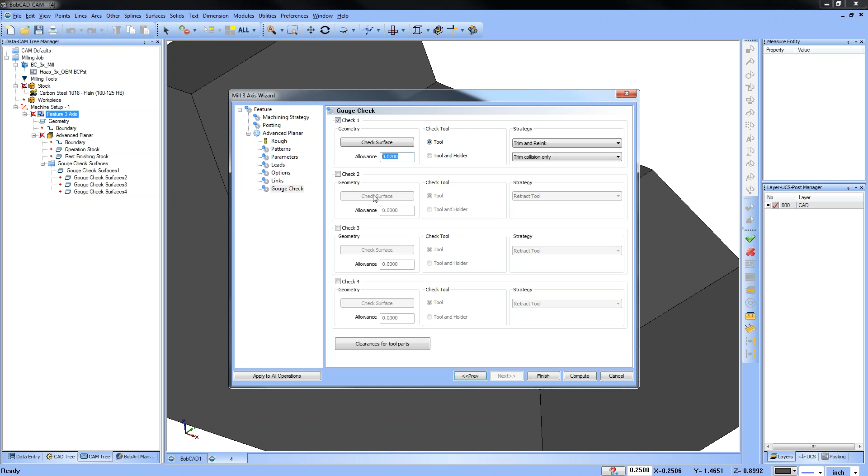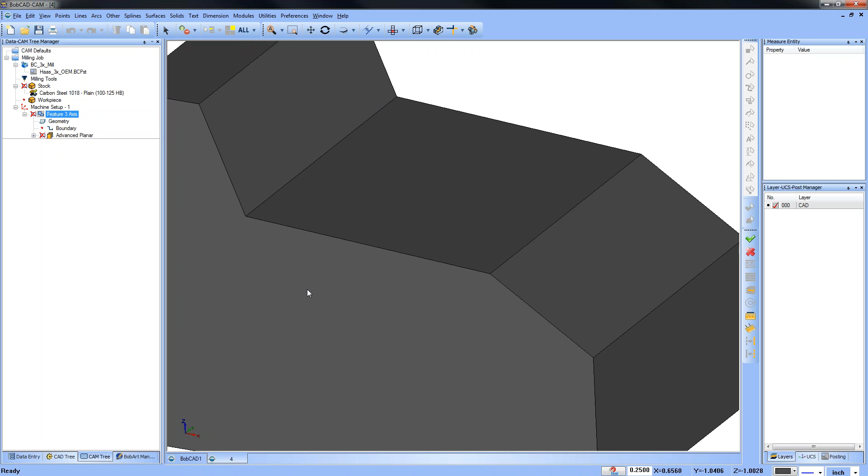Al, if you need to cut that center vertical wall sharp now, how would you do that? This vertical wall sharp, I mean, you know, it's on an angle here, so it's tough. It is flat along this edge here, so I think the best you could do is maybe profile with an end mill to get a finish there, and you may have some material left here, so you might step down to a smaller tool to kind of clean that up. Okay, so that's probably what I would look at there.

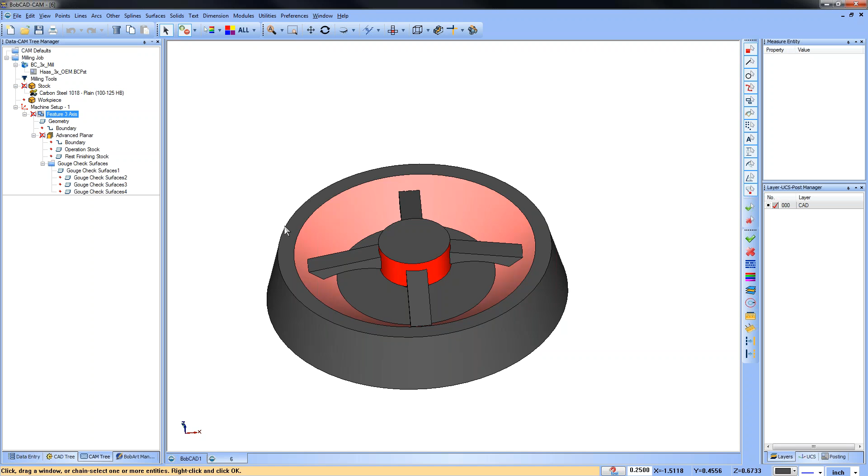So let me close this file down. Let's see here. I'm going to skip this one. I'm going to go to this guy here. This is just another example of using check surfaces and the way that you can use them. Let's go ahead and remove this. We're going to get rid of our, oops, hold on. Let me turn that off and recompute. This is an area where we can see this is the surface that we've selected. When we're driving our tool path, it's driving right into the model. That would be a problem for us.

Charles, I don't think you can use a negative allowance. Well, I'll have to check that in just a second, to try to get it to go outside of an area, maybe is what we're thinking there. Not sure. All right, so we have this area here, and again, this is a scenario where if we come in and we select this and we recompute using a boundary, the tool center is being driven to the boundary, so you can see it's still colliding with our part.

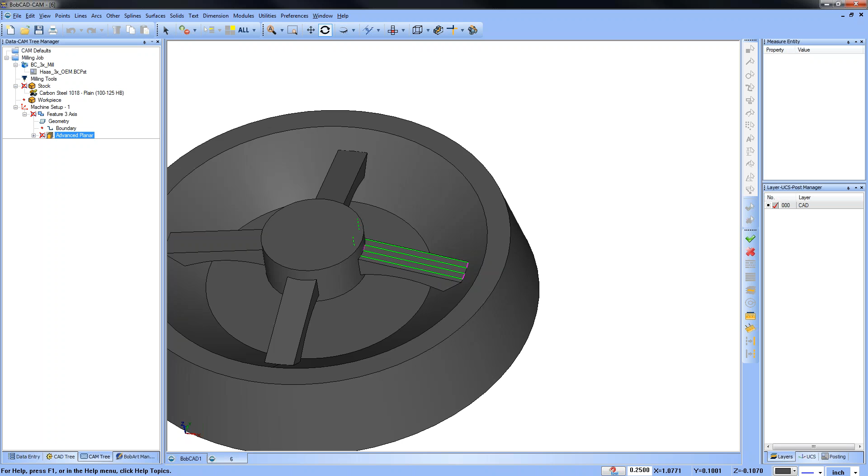If we come in here under our options and maybe we said tool inside, maybe we can get the tool to be inside of the shape, but again, when we do that, we're not actually cleaning up all of the surface area there, okay? So if we get rid of the boundary and we recompute, this is again another scenario where check surfaces come in really handy.

We can come in here, say gouge check, check. We can select this inner wall here. We want to stay away from that, and we can select the outer wall there. We want to stay away from that, okay? So those are the two surfaces that we want to check against. Here we're going to do a trim and relink. We recompute, and you can see that it generates some toolpath to come in here and just machine that area.

The other thing we could do as well is maybe not trim and relink. We could retract the tool, and this would drive that tool along those surfaces and kind of bump them up to stay away from those walls. All right, so hopefully that's pretty clear as well.

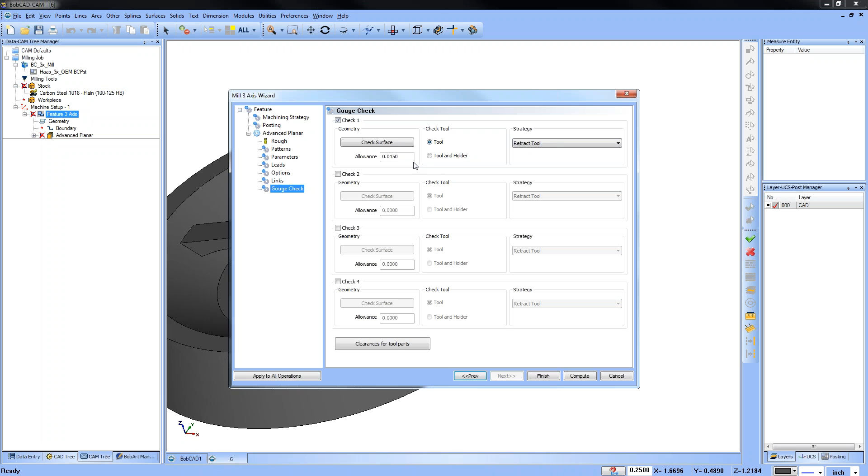I'm not sure what it would do if we set a negative allowance. I think it just doesn't do anything because you're saying how far you want to stay away from a surface. So I don't think it did anything. If we add our allowance back in, then you can see that it bumps up and away.

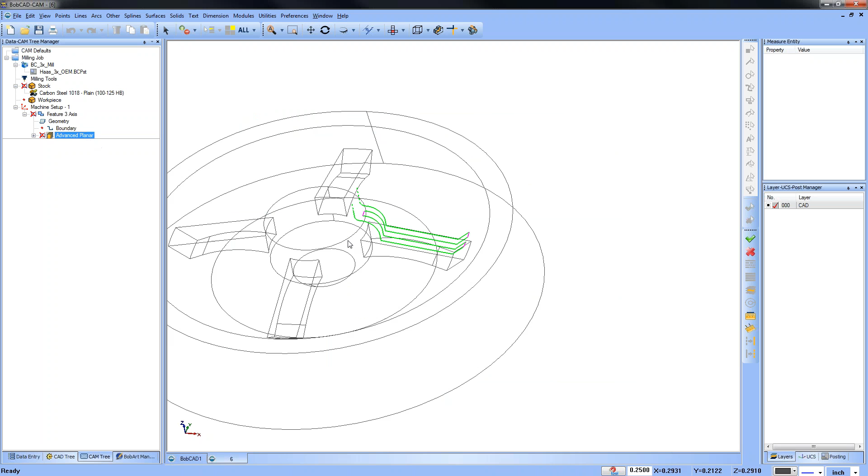Let me try a trim and relink. We'll do trim and relink minus 100 thou. I'm not really sure. It did something, but I don't believe that that's what its intention is for, or I'm not sure how that intention would work. Okay, Charles? So hopefully that answered that.

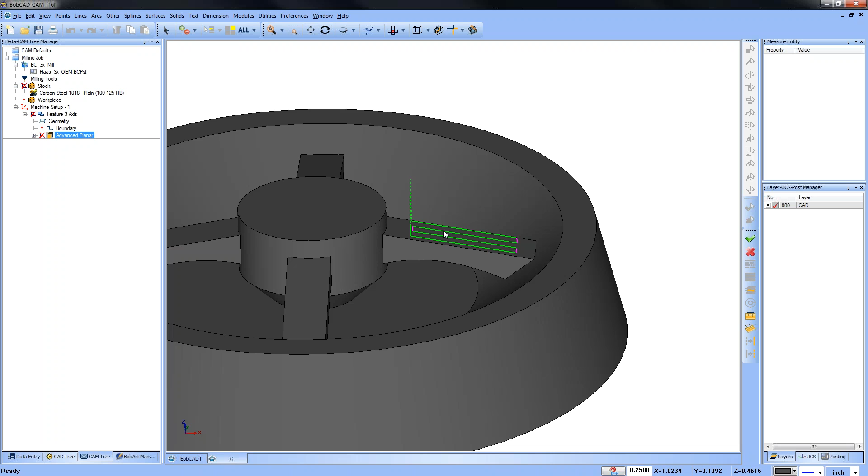Can we use gouge check as a poor man's cutter comp? I wouldn't look at it that way, but I would use gouge check as a way to keep the tool away from a wall or other surfaces, Rob. So I guess in some ways, sure, you could use it that way, but I wouldn't really use that same terminology there. Okay, so again, just another example of using check surfaces.

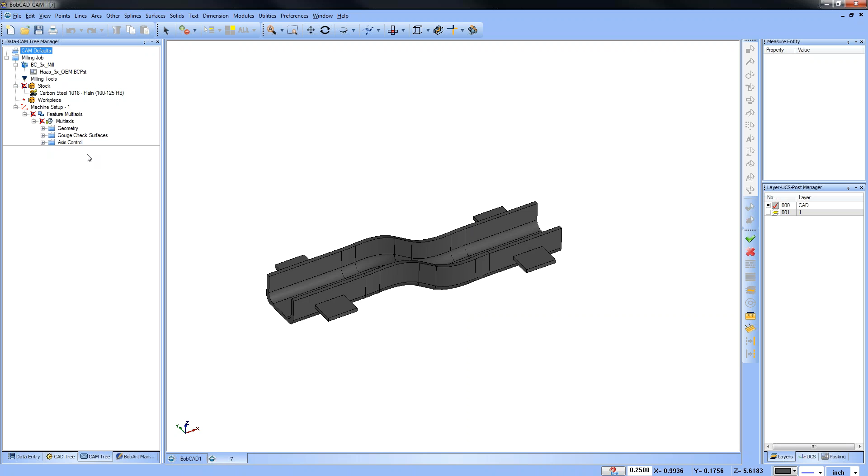Now, for you that stuck around, I think you're in for a little bit of a treat. Here we have just kind of like a prototype part. We have some fixturing that we're working on. This is some of the more complex surfaces, okay? So this is another example of using check surfaces. Now, what I'm showing you here is not done with the Mill Professional toolpath. This is done with the multi-axis toolpath. This is a surface-based toolpath, okay?

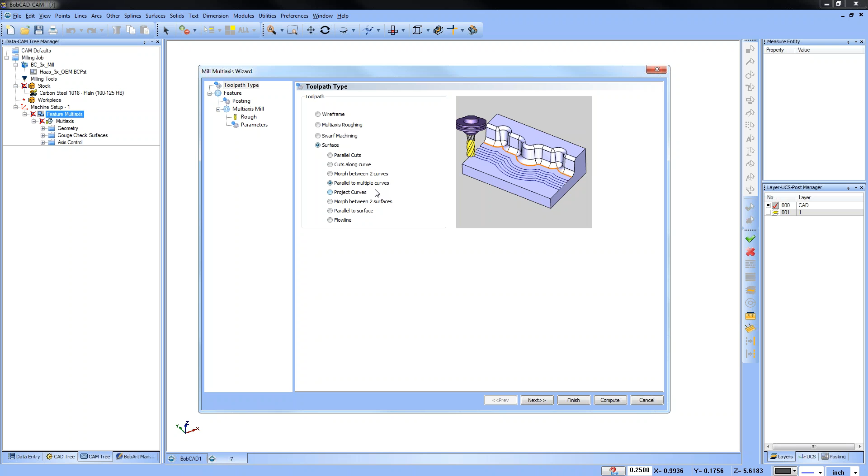So as you go from Mill Standard to Mill Pro, you unlock more features. As you go from Mill Pro to multi-axis, you unlock additional features, okay? Some of the questions that people ask have to do with lead in and lead out and retracts and additional control over what happens when you're dealing with check surfaces, and that's where you're going to find these additional options. Again, you have your check surfaces here. This is where you can use check surfaces for tilting and things like that. So as you get into 4-axis and 5-axis, the same concepts that you're learning in 3-axis, you're going to be able to use for 4 and 5-axis, okay?

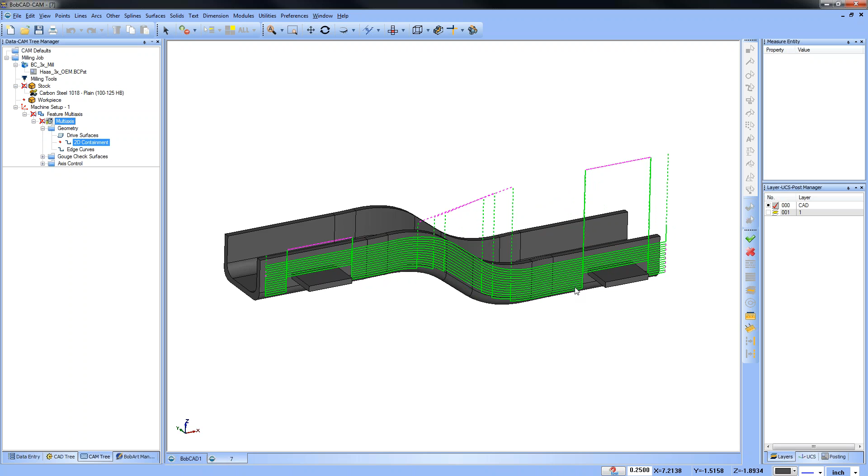The other thing you'll notice as well is when you get into your linking, you're going to have a lot more control over your linking. So you can say what happens in gaps or as it trims out. Do you want to use a lead in and do you want to use a lead out? In this example here, what I'm using is this wall as my drive surface. This is my edge curve, and then you can see the toolpath is coming down, and then in order to keep it away from what's holding it to the fixture, I'm using check surfaces to check that toolpath away so that it doesn't cut through the tabs, okay? So that's just an example of ways that you guys can use check surfaces there, okay?